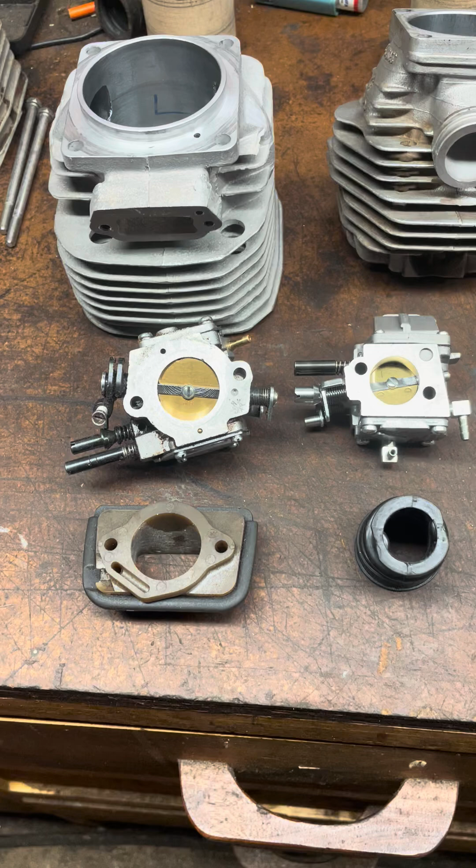Let's talk a little bit about intake ports and volume, as far as area of the port. I'm doing area of the port in millimeters, and my theory is that the port should be the same size all the way through.

So I've got a 3120 and a 660 to compare the differences in these ports. I wrote down some numbers and notes here. The area of the carburetor opening, not considering the throttle shaft, shutter, choke shaft, all that kind of stuff, just measuring the hole. We don't have to overcomplicate this, but get a ballpark idea where we should be at.

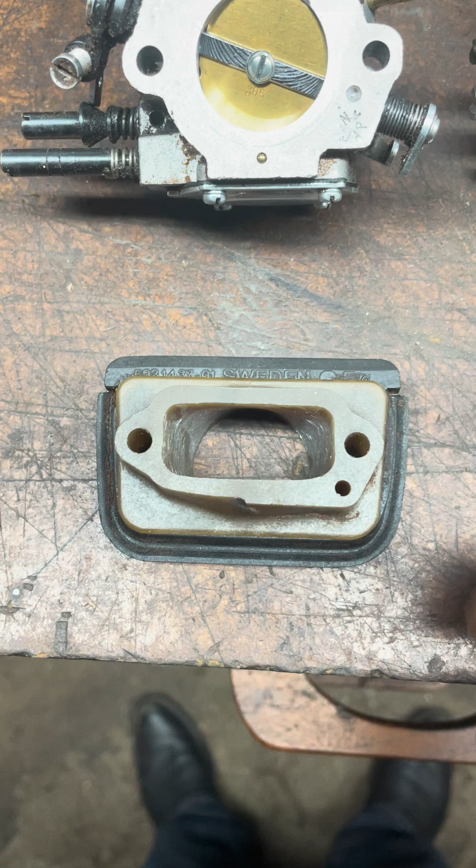Area of the hole on a 3120 is 572 millimeters. The block is the same size hole, and the other end of the block, to match the port to the cylinder, was slightly smaller, a less area.

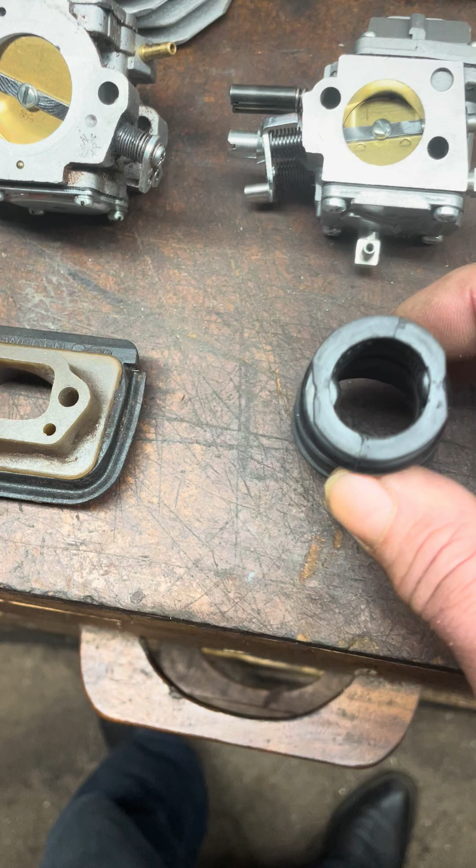If you look at a 66, the bore of the carburetor is 346 millimeters. The boot's the same all the way through, one end to the other. And then the port here is 2 millimeters larger. So right off the bat, when you put the boot on there, you've got an eddy in there. This is larger than the boot, and that creates a problem. That area becomes 452.

So then I take a block, my cylinder block, and I stick it down in there. And I put these marks on the side of the port, top and bottom. Measure my surface area. I'm not considering my radius. I'm gonna lose a little area with the radius, maybe 4 to 6 millimeters. I'm not that fussy to get it perfect. In reality, there is no perfect. So let's not overcomplicate it. If you want to add 6 millimeters onto the port size, that's fine. But we're getting closer, right?

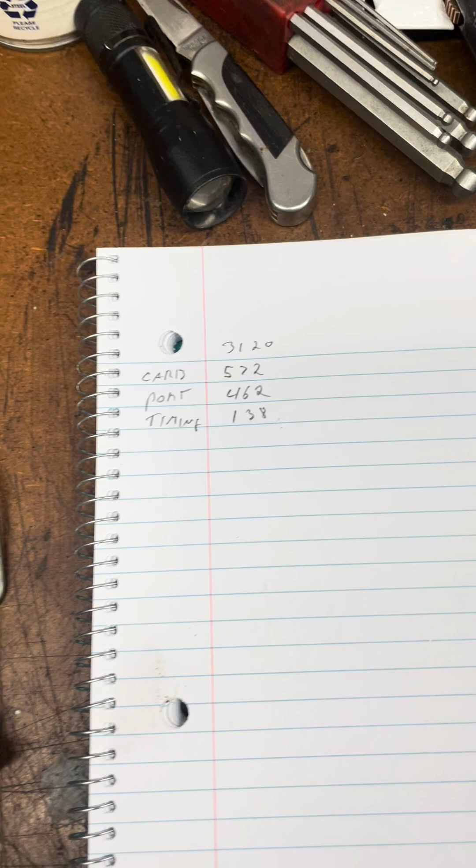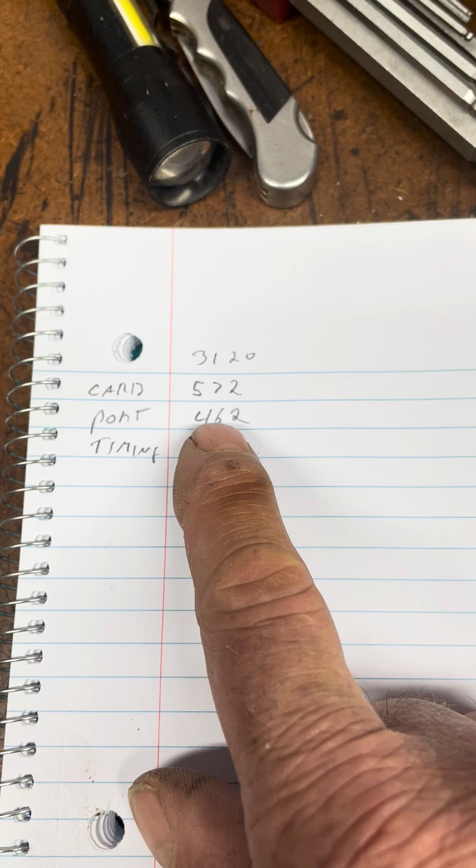So the port size, by measuring it square, is only 462. We're over 110 square millimeters of area shy.

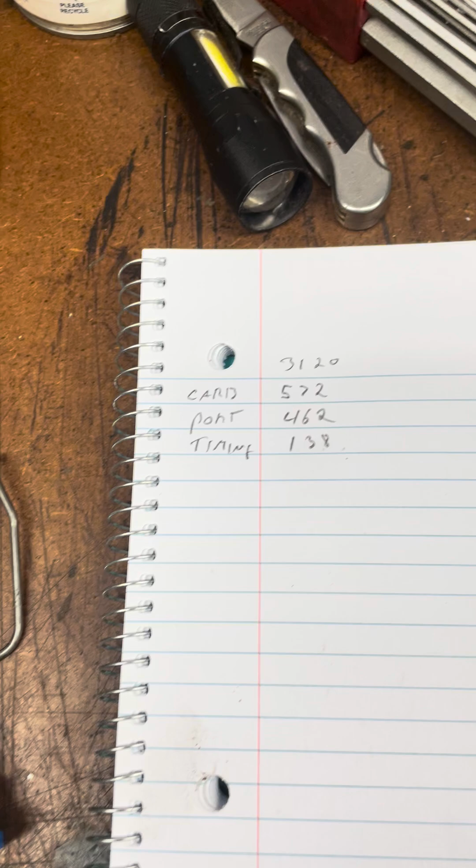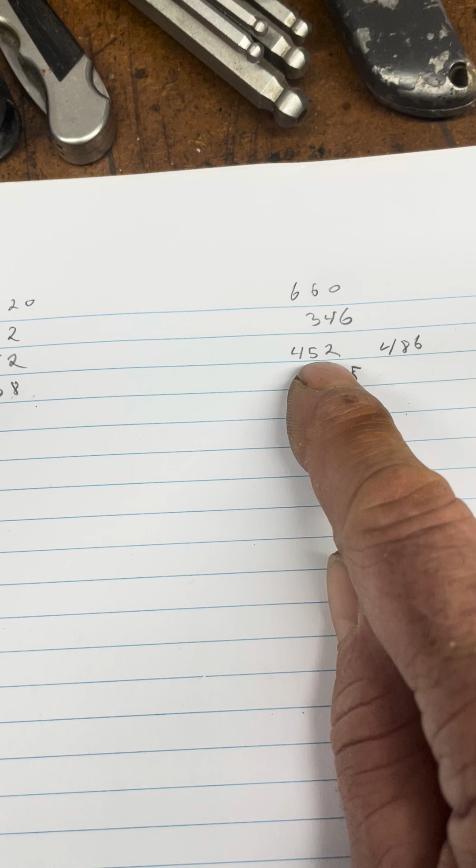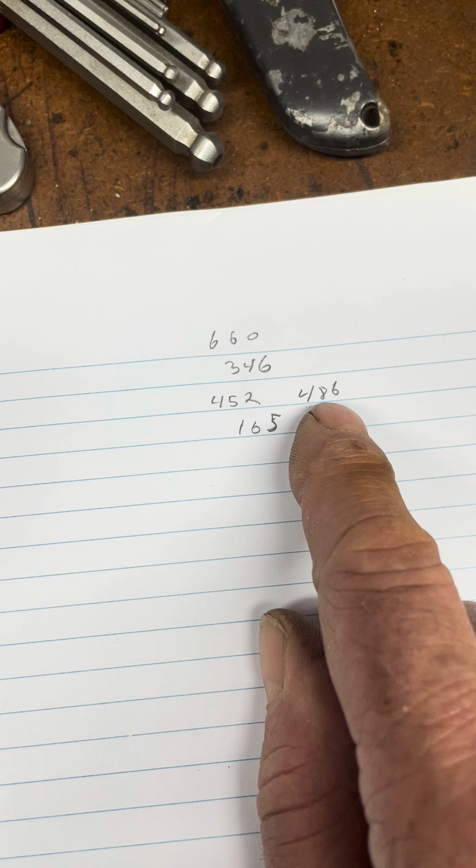If you look at a 660, the carburetor's 346. The area at the boot on the cylinder is 452, and the area at the cylinder at the piston is 486. So it gets quite a lot bigger. We're looking at 140 square millimeters bigger, where the 3120 gets smaller.

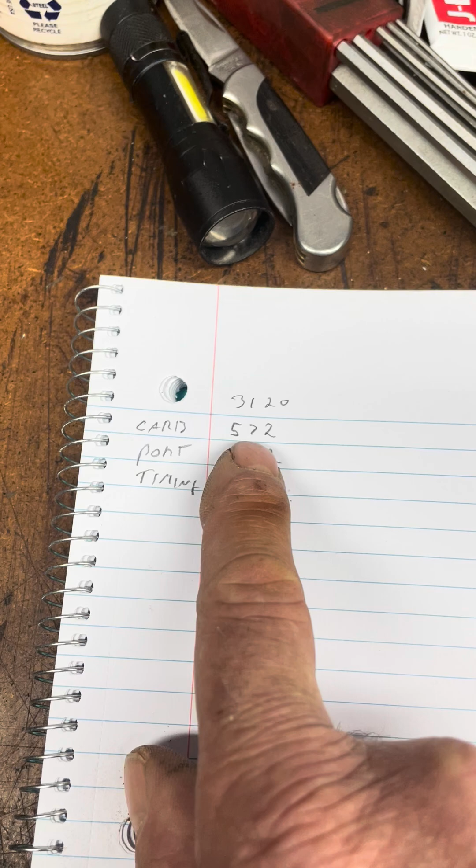And I think that they should be the same size all the way through. I generally epoxy the roofs down on these 660s and stuff to make that port smaller, and all the way around it to make it fit the boot, so I don't have that eddy in there. That's just disruption of flow. The 660 port becomes very lazy, and the 3120 becomes restrictive.

And so we talk about RPM, and everybody seems to say, oh geez, you want more RPM, you got to raise the exhaust. The exhaust ain't where you get your RPM, guys. Well, to a point. I mean, if your exhaust port's only 120 degrees in duration, then yeah, that's restrictive. But if you've got a reasonable exhaust port duration, anything reasonable, you're not going to gain any RPM or usable RPM by raising the exhaust.

Raising the exhaust is going to decrease your compression. It's going to decrease the duration that the charge or whatever is pushing down on your piston. That time is shortened so it doesn't push as far. And all of those, that's decreasing your torque. So you can trade some unusable RPM and take some torque away by raising the exhaust. Both those are things that I don't have any interest in doing. And it depends on your exhaust duration, but that's somewhere of where we are.

Now, there's a lot of different ways to alter your port timing. You can lower it, you can raise it, you can put some epoxy in there, you can change your port timing. You can also cut your piston skirt.

If you want more duration, you can cut off your piston skirt on the intake side and give yourself more duration. On a race saw, those ideas are all fine. It's a customized piston, a race saw. Its longevity is not all that crucial.

It's making 3 cuts and you go home. Where a work saw, it's hours and hours and hours, and that piston is going to wear out, and sooner or later it's going to be replaced.

On my saws, I prefer a bone stock piston when I'm done porting a saw for a work saw. It's because it's going to wear out, and the customer can simply put a new piston in it and he's right back where he was. If you have a customized piston, pop-up piston, whatever, you can't simply order a piston, throw it in there and go back to work. You won't be back where you were.

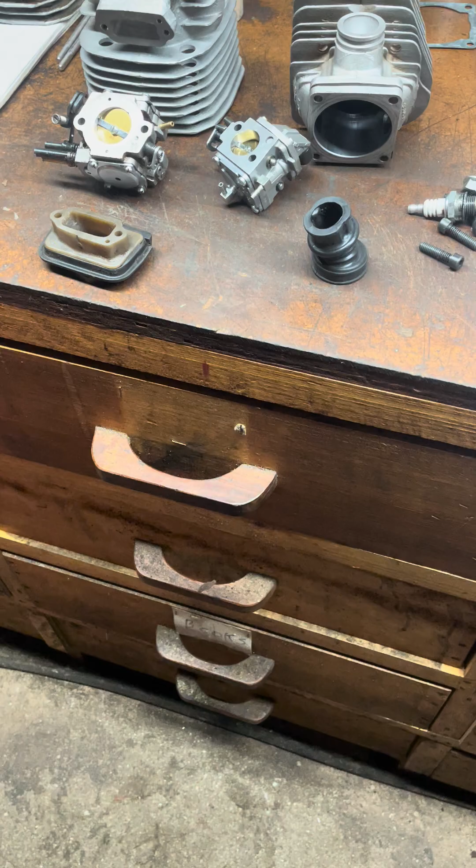A pop-up piston, you definitely can't just throw a new piston in. If you just cut the skirts, yeah, you could just throw a piston in there, it'll run, but your duration will be different. But for a work saw, I prefer to leave the piston stock. I don't want to do modifications on the piston. So I would choose epoxy over cutting the piston.

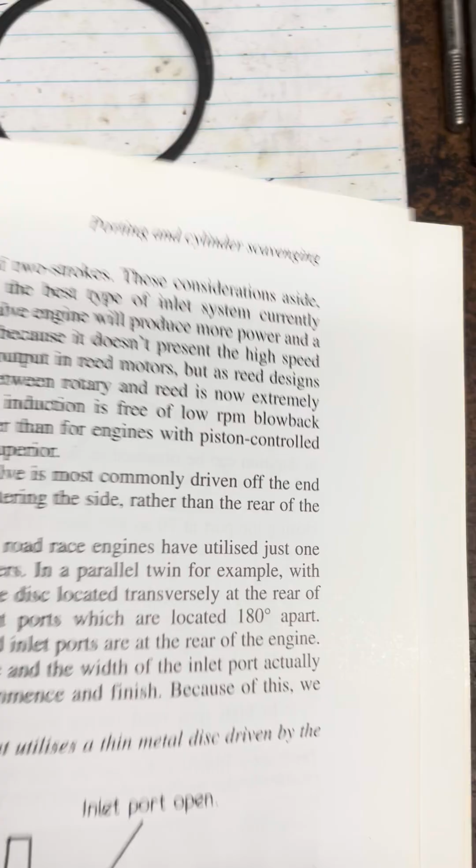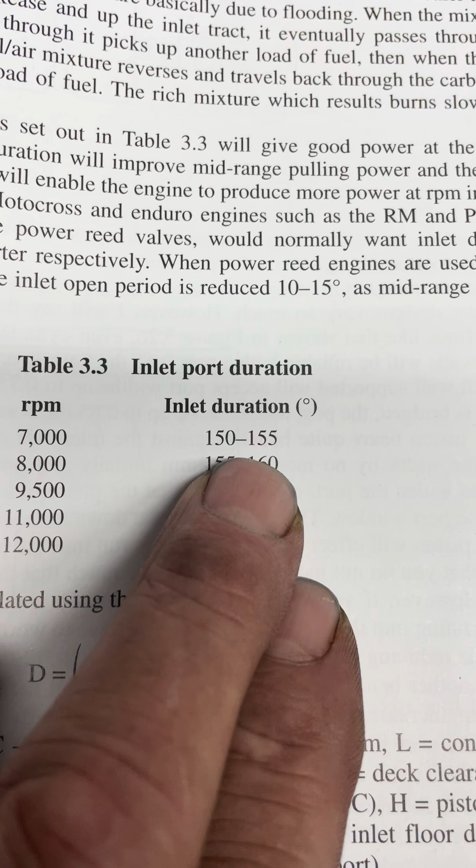The other thing is your port timing, and everybody recommends these. Let's look at the professionals' ideas on port timing. We got chapters in this book that go on port timing, and their claim is that to get 7,000 RPM out of an engine, you need 150 to 155 degrees intake duration. To get 12,000 RPMs, you need 195 to 200.

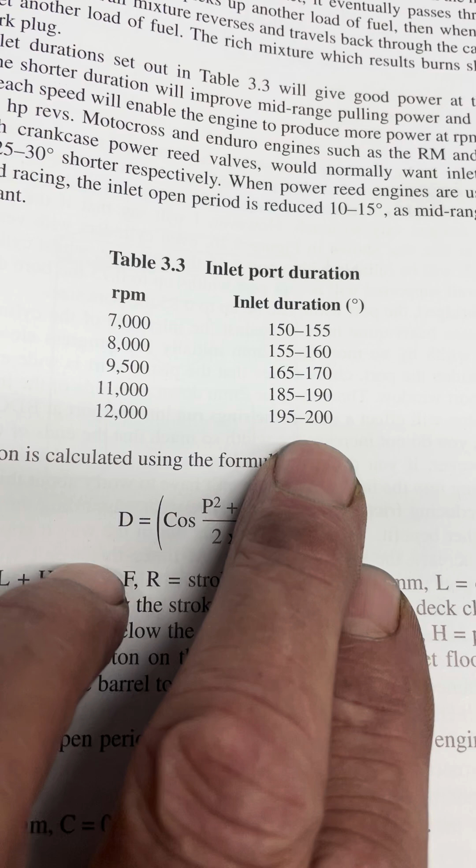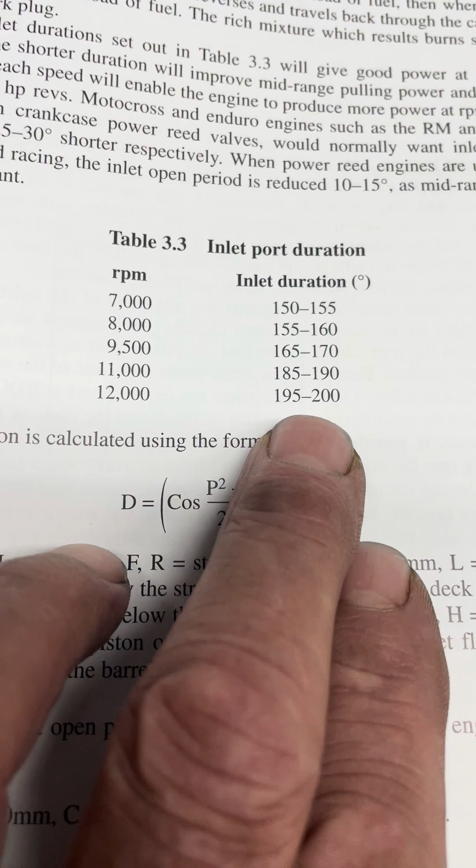This may work in a motorcycle world or a snowmobile world or something like that, but these numbers do not jive whatsoever in the chainsaw world. These books are a great read to get basic ideas. There's some good things in here, scavenging, that kind of stuff.

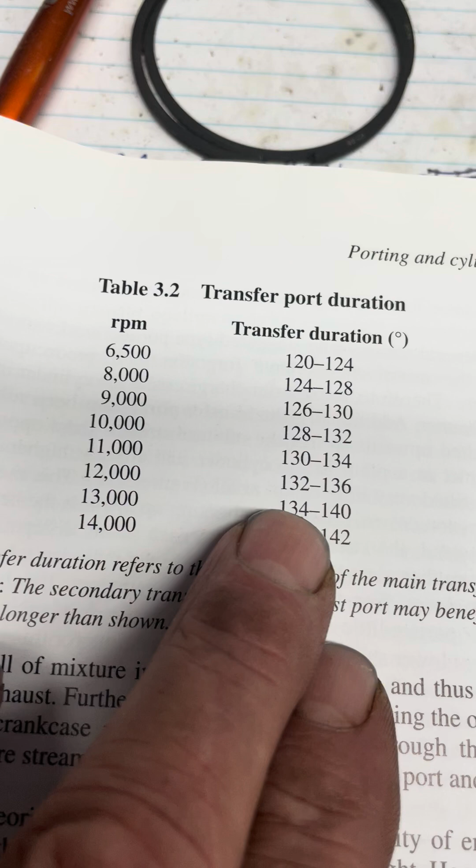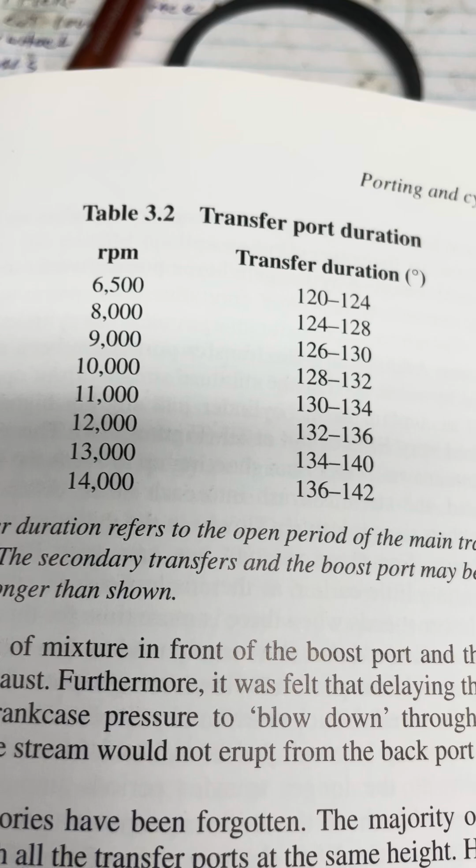Here's a transfer port duration chart. Here again, to get 12,000 RPMs, you need 132 to 136 degrees of duration in the transfer timing. I wouldn't ever even dream of raising my transfers to that height. I wouldn't have hardly any blowdown.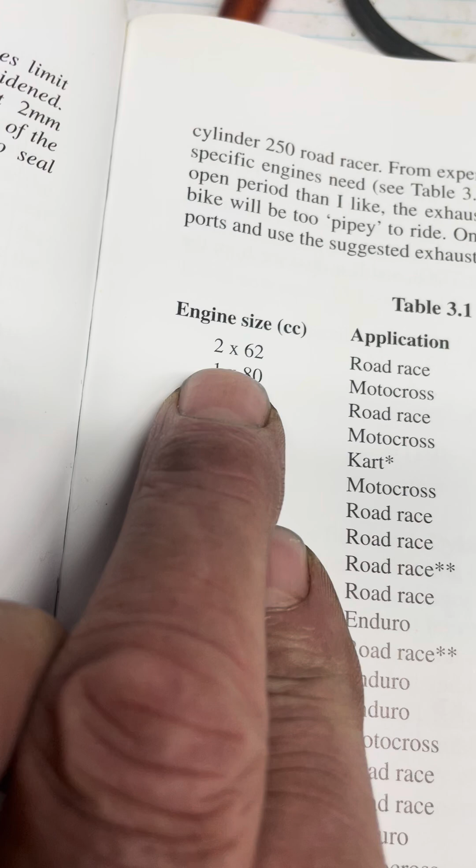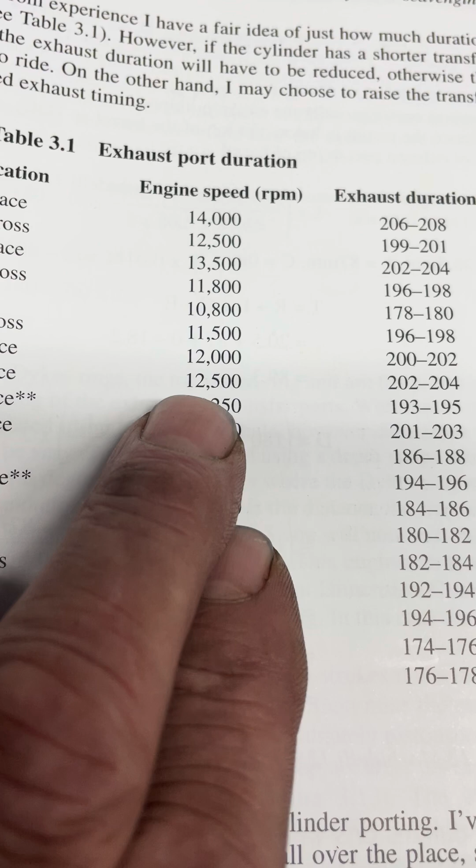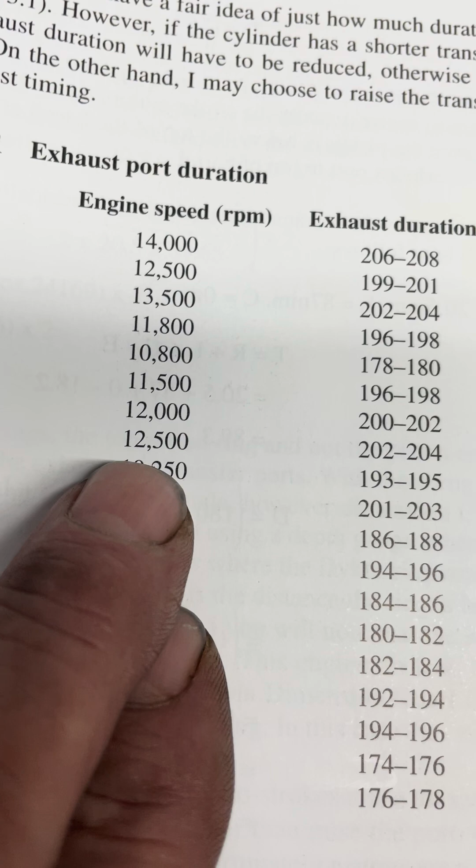There was a thing in here - well, here's your exhaust duration tables. This is engine and cc, so I think this is a 2-cylinder, and each cylinder is 62 cc, but I'm not for sure on all of this. But this is exhaust duration, and let's just look at anything here that says 12,000. Look, guys, 200 degrees of duration. In my mind, we're barking up the wrong tree here. That's a little excessive.

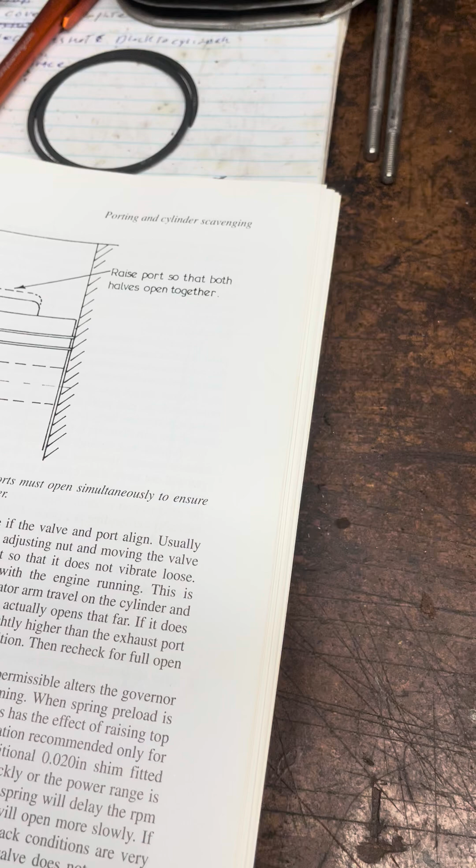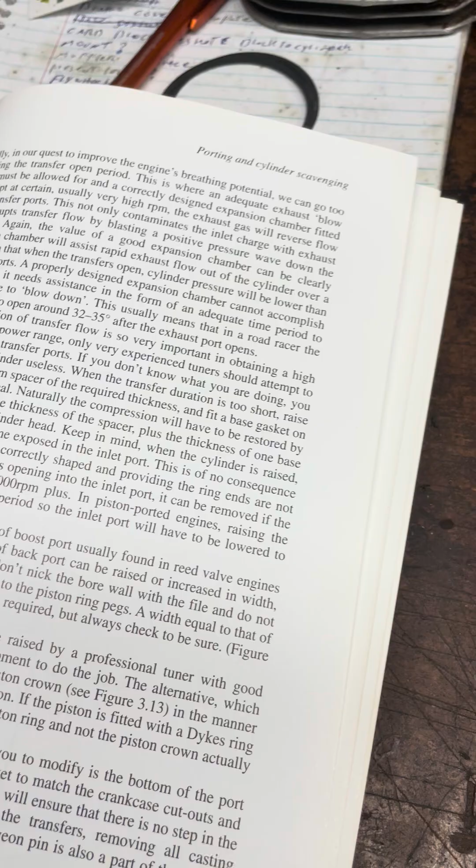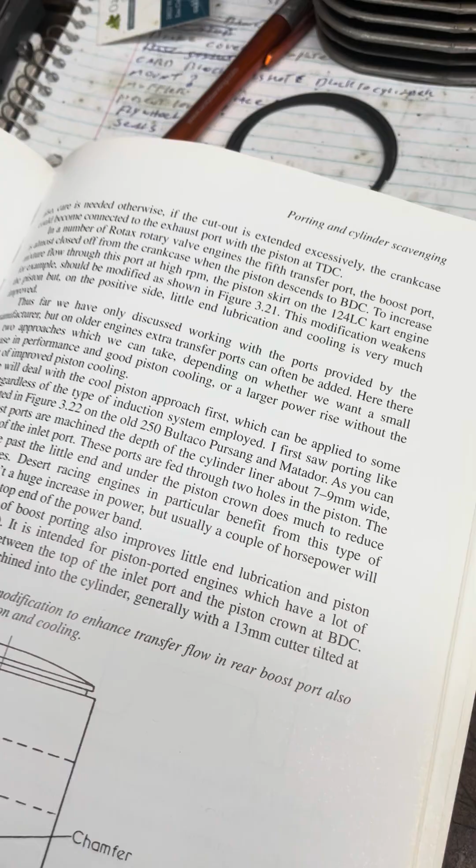You know, where is that? There's a little spot in here that explains scavenging fairly well, and that's all in your duration timing. Well, I don't see it right now, but I saw it earlier. But keep in mind, these books are not chainsaw oriented whatsoever. And here, this explains how these engines scavenge.

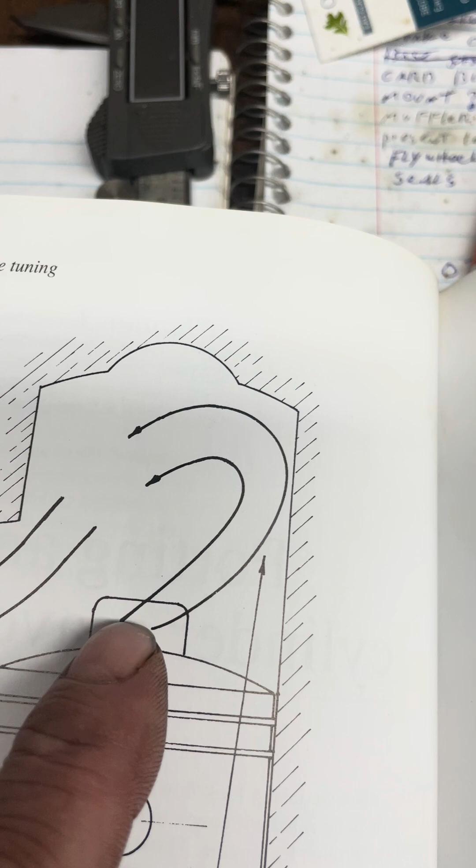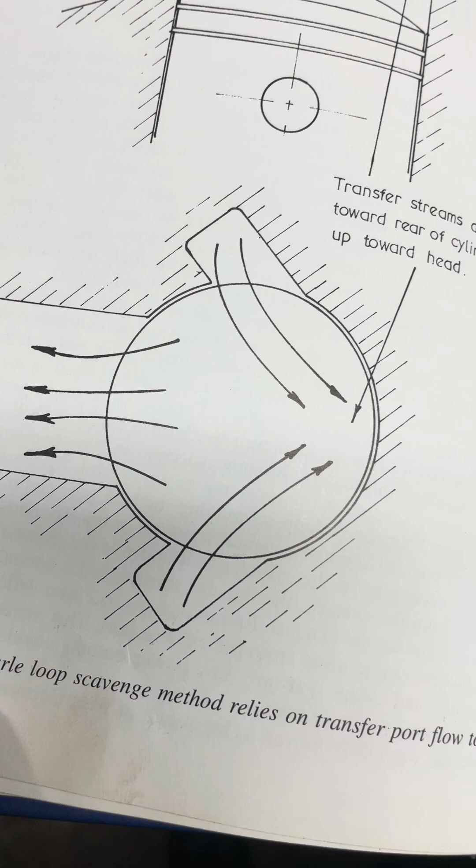What I talk about - I want that air to go straight across and hit the back wall, and they're pushing it up and whatever like this, and they're leaving a dead spot here by angling your transfer ports upwards. I want mine to be flat on the roof, so it pushes it and fills this void, and then pushes everything up and over and out. I seem to get better scavenging that way, but it kind of explains how the scavenging works.

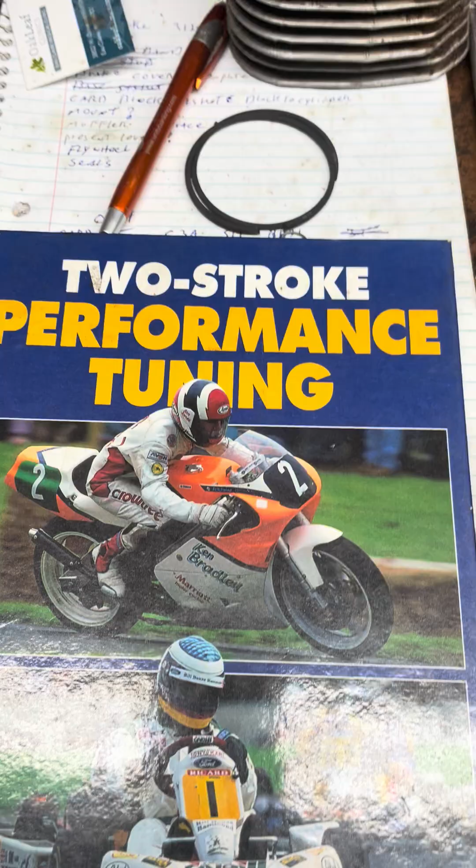Chapter 3 of that book has a little bit of information in there, but don't get carried away with it. It won't work for your chainsaw. If you go by those numbers, you're gonna have something that probably will turn extreme RPMs but won't have any torque. And we need torque to make this thing work.

You know what sets off a pro porter, a guy that's been doing it for 30 years, got some knowledge and understanding, versus a guy that's just a hack, got an idea, saw something on the internet, thinks he can do it himself with a chisel and a hammer and a little Dremel tool. Oh geez, he wants to cut the base, gets his wood router out, sets up a little thing and cuts the base with a router, and on and on. I've seen it all, guys.

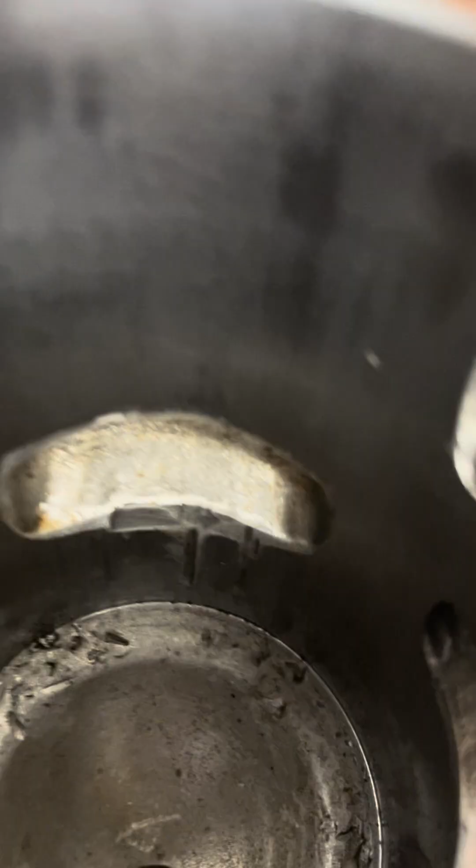It's the failure rate. Do they get some gains out of their saws? Yeah, I know, I've seen it. I've run them, I know. But the saws don't last, and then we see catastrophic failures. Not quite understanding what they're doing.

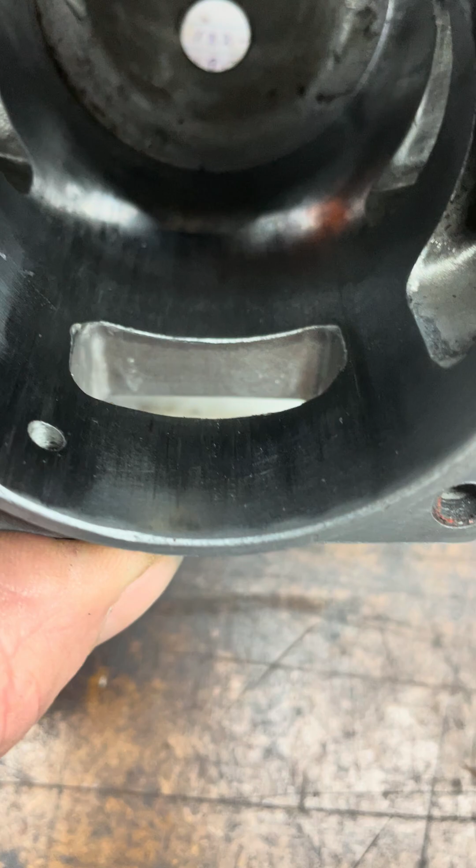Do I stand behind it? Well, it's in my shop, so this ain't one of mine. I studied his cylinder here a little bit, took his port timing numbers off from him. I don't know, that doesn't really make a lot of sense to me. But I did measure the port area, and he didn't get crazy with it. It's still less port timing or port area than the carburetor. So he got somewhere. He's got about 510 in there, and stock was 462, but he needs to get up around 572. So, got halfway.

He also put an external impulse on it at one point. This is the original impulse, and that's an external add-on, drilled a hole through there. That idea is okay, but you needed to put a little notch in here, because the piston covers it up, right? Needs to have a little notch in here. He didn't do that.

Which is something I'm going to modify on mine as well, but I'm going to leave mine internal. I'm going to drill that hole all the way through into the cylinder, and then I'm going to put a little notch in here, and I'm basically going to have a double impulse there. The reason I'm doing that is because I'm going without a gasket, I'm going with sealant, and there's a chance I'll plug this hole with sealant. So I'd rather have a second port coming up through there to ensure I have good impulse when I get it all done.

Little things - again that's kind of the difference between knowledge and somebody that just has a bright idea. I mean, the idea ain't horrible, it's fine, but I don't know what he was going to run for a carburetor. With a 3120 you'd have to have a nipple right here for the impulse.

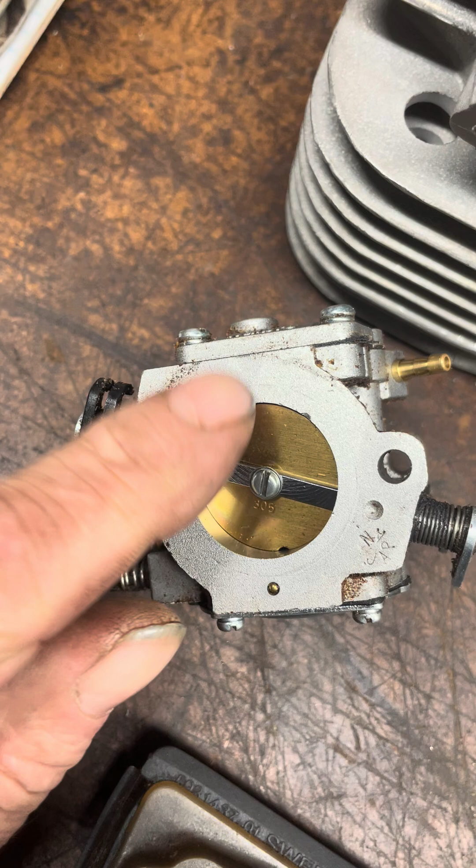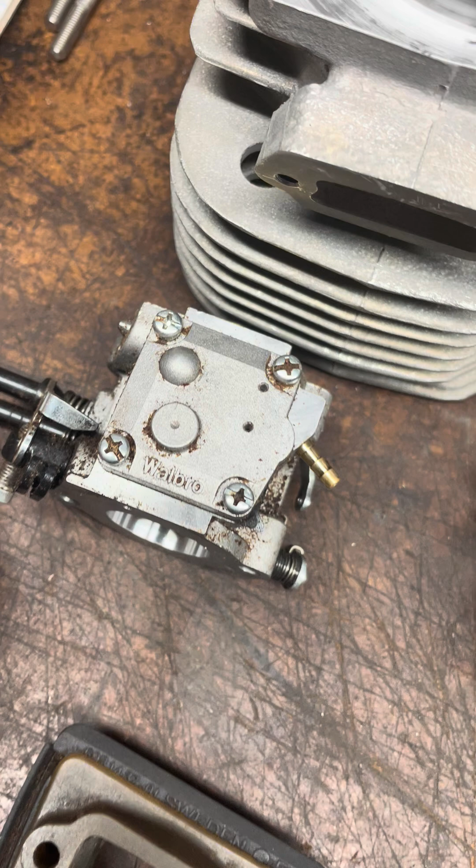Right now it's right there. For the external impulse, you have to drill right where that little button is, put an impulse pipe in there. I think the Stihl uses the same cover or basic carburetor, Walbro, and this top plate already has an impulse in it - you could just buy that plate or put it in yourself, either one.

So what I'm building here is somewhat of a race saw, I guess. I'm not going to get crazy with an RPM saw that turns 15,000 RPM. It may when I get done, but usable torque is what I'm after. Sometimes the RPM comes with it, sometimes it don't. I'm sure this is going to turn a lot faster than stock, but not insanely high. Free load RPM out of the cut does you no good whatsoever. It's the RPM that it holds in the cut that counts, and you have to have torque with that RPM to make it work. So that's what we're chasing after.

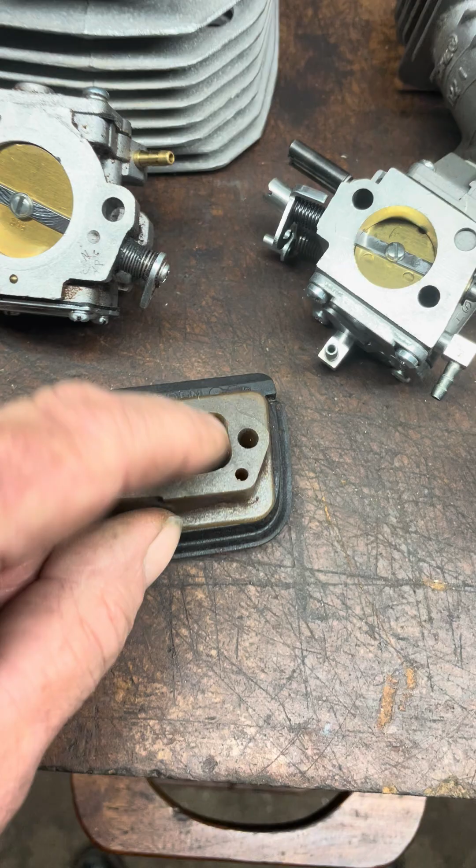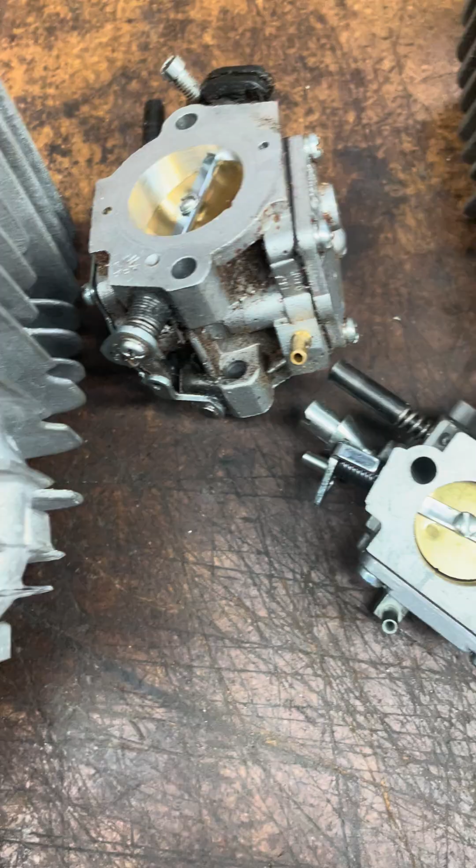I already did a little work on this block. I kind of reshaped it a little bit, got this diameter the way I want it. I put a gasket on there, but when I put it on here - I don't know if you can see in there - we've got a little metal to remove, some shoulders in there, some problems in there, and then we'll get this opened up all the way.

Seeing this needs a little more intake timing to it, I'll gain my area by lowering the floor. I've got to do a little bit on the width too - it's a little bit odd shaped, so I'll get a little bit on the width and the rest on the floor, and then I'll be cutting the skirt to get the timing I desire. By doing that, I don't have to do any epoxy work in the cylinder at all.

I don't know if there's much else I need to really talk about intake stuff here. Well, I could talk some more about exhaust port stuff, but...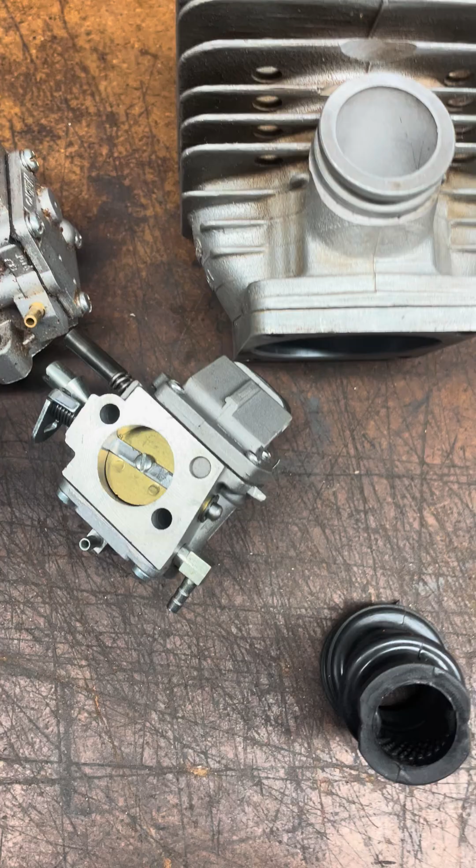I believe in my mind that the area of the carburetor should be the same as the area of the port. The area of the boot should be the same, or the block, whichever the saw has, and that area should be all the same. It's not restrictive and it's not lazy, if that makes sense to you.

Main reason why I put a lot of epoxy in 660 cylinders - they have too much duration to begin with. Generally, once I lower the cylinder, they do raise the compression. But 660s are notably wildly different on all their port numbers. If you've been at it for a while, you'll know.

And it does not matter if it's an old red lever, red light, whatever - it's all the same. If you're lucky enough to get a 660 cylinder with low numbers in it, it's going to perform much better than a 660 with large duration numbers in it. And when you get that one with low numbers, yeah, you got something that works. But it does not matter - red lever, red light, anything, it doesn't matter, guys.

I've gotten relatively new 660s with good numbers, and I've had a lot of old red levers with just horrible numbers. So it doesn't matter. The red lever thing - somebody had one with good numbers in it, they had a lot of these old saws they wanted to sell. They took that really good one, ran around all over with it, like 'oh God, these red lever saws are so much better.' And he sold all his saws for premium price. And the folklore continues, right?

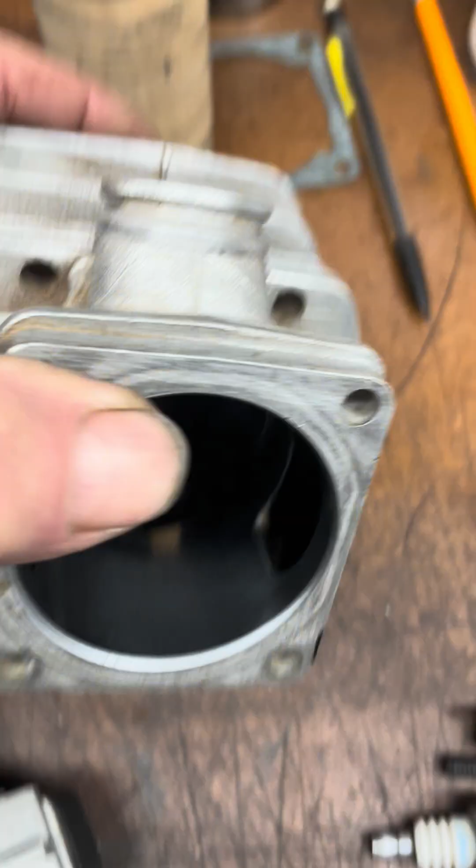Even like the 462s, 400s will more than outperform them old saws. They're just so much more into them - better porting, better port designs, on and on and on, and they're just going to shine. So better fuel economy, on and on and on. And this is one of the big things on fuel economy - we got this great big huge port in this thing, stupid port numbers in it, and that's why a 660 is so hard on fuel.

But throw some epoxy in there, they get better on fuel and they perform better. All the way around, I'm getting more out of those saws. And you want to talk about production, work saws and production saws - we can make them just absolutely scream, but they're out of gas in 10 minutes. You're not making production if you're constantly camped out at the gas can.

So I take all of that into consideration when I'm building a work saw. We don't want saws that are extremely hard on fuel. We want them to perform, we want them to get something done. So I'll trade off a little performance for fuel mileage. It's production, guys, it's not - we're not racing. We're trying to get some wood on the ground.